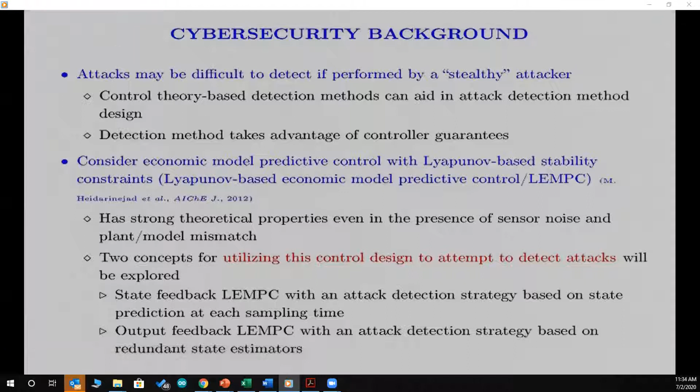This talk focuses on co-design of control and attack detection methods for cyber attacks on nonlinear systems, with a focus on a specific control formulation known as Lyapunov-based Economic Model Predictive Control, or LEMPC. We focus on this control design due to its strong theoretical properties even in the presence of sensor noise and plant model mismatch. We primarily focus in this talk on a state feedback LEMPC with an attack detection strategy based on comparing state predictions and measurements at each sampling time.

We close by mentioning that an LEMPC that receives state estimates instead of state measurements for a process equipped with multiple and redundant state estimators may provide another concept for co-design of control laws and detection algorithms with guarantees.

In general, cyber attacks can be performed to break a typical control loop at some point. In this talk, we focus on cyber attacks that break the control loop between the sensor and the controller and provide false sensor measurements to the controller. This prevents true process knowledge from being obtained by the controller. As we will see later in this talk, this cannot be handled by techniques for handling sensor measurement noise alone.

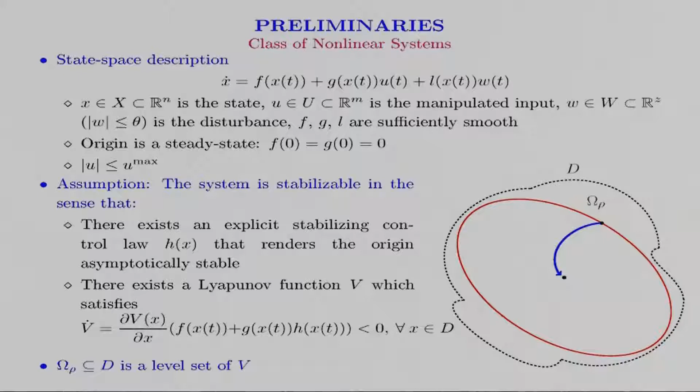We consider that full state measurements are available continuously for this system, but that they are impacted by bounded measurement noise. For this class of systems, we will be exploring the impacts of cyber attacks on sensors for the feedback control law known as economic model predictive control.

With additional constraints to be discussed subsequently, this control formulation has theoretical guarantees regarding feasibility and stability in the presence of sufficiently small bounded measurement noise and disturbances.

False sensor measurements do not ensure boundedness of the error in the state measurements, and therefore do not necessarily allow these guarantees to be maintained.

The additional constraints which allow the closed-loop stability guarantees just described to be obtained are Lyapunov-based stability constraints that, when added to the EMPC formulation on the prior slide, and with a slight change in the way the input rate of change constraints are enforced for feasibility reasons, give a formulation of Lyapunov-based EMPC, or LEMPC.

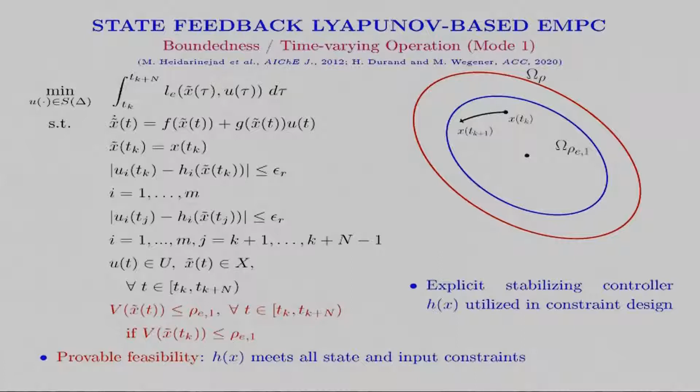This constraint is designed using the explicit stabilizing controller h of x, and that controller is guaranteed to meet all state and input constraints at every sampling time.

This control law also allows us to guarantee that the closed-loop state is always maintained in the stability region omega rho, and also to ensure that the measurement, even though impacted by noise, is also maintained in omega rho.

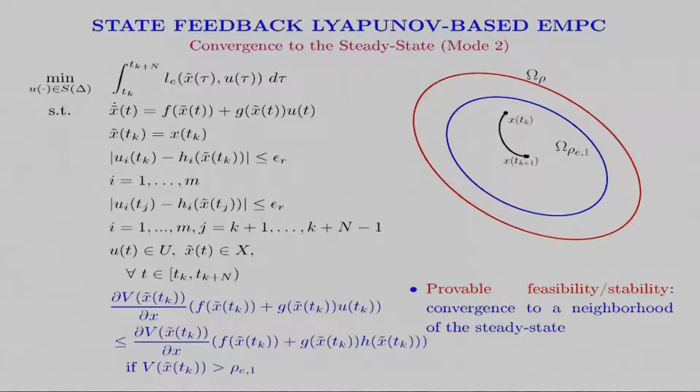The second mode of operation of LEMPC allows both feasibility to be guaranteed as well as stability, in the sense that if the mode 2 constraint, shown here in blue, which enforces a decrease condition on the Lyapunov function, is enforced repeatedly, it can drive the closed-loop state to a neighborhood of the steady state.

Though the control law just described has attractive stability properties, cyber attacks on state measurements provided to that controller could prevent those stability guarantees from being realized.

This is because even though the guarantees just described can hold in the presence of sufficiently small sensor noise, a cyber attack may act like insufficiently small sensor noise.

This indicates that it would be desirable to detect an attack by looking at the deviation of measurements from the actual state. A method of approximating the actual state is through state predictions from the last measurement.

This gives one idea for a cyber attack detection strategy for LEMPC. The difference between the measurement and the prediction of the state could be checked at each sampling time. If the difference is larger than an expected threshold, the state measurement can be flagged as a possible attack.

If it is below a threshold, it should be able to be tolerated by the controller for the subsequent sampling period, in the sense that the closed-loop state should still be within a bounded region of operation at the end of the sampling period. Based on the fact that LEMPC with sufficiently small measurement noise can retain closed-loop stability in this sense,

it should be possible to design an LEMPC that can maintain the closed-loop state in a bounded operating region after what I'll term a sufficiently small cyber attack, meaning one which does not trip the detection mechanism, occurs.

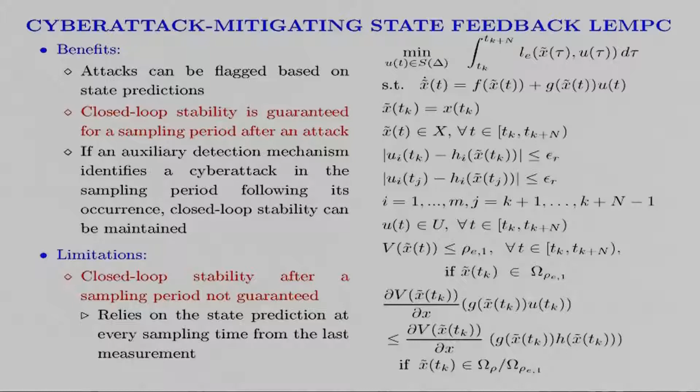This is because it relies on a state prediction from the value provided as the sensor measurement at the last sampling time. Once the last sensor measurement is falsified, the predictions coming from this value are no longer representative of the process state. This can be thought of like the state never receiving true feedback when an attack is occurring, and like sensor noise having a potential ability to grow over time.

We will now provide an illustrative example to clarify the concept that cyber attacks resulting in falsified state measurements, if they are close to the actual values, may not cause an economic model predictive controller to show closed-loop stability issues in a sampling period, even if Lyapunov-based stability constraints are not used. We also demonstrate potential issues with continuously falsified measurements.

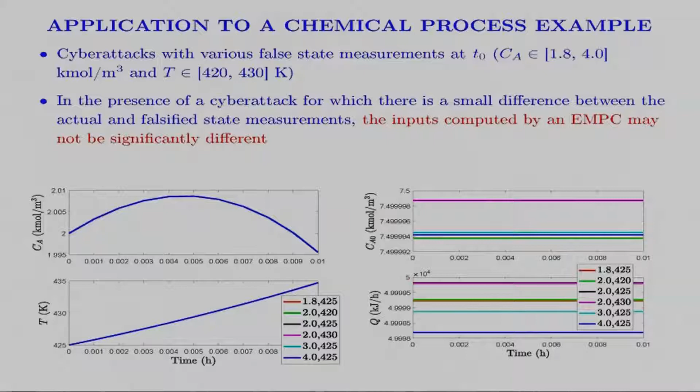Next, we look at how measurement noise and false sensor measurement cyber attacks can differ. Here, we provide a false state measurement to the controller at every sampling time and look at how the actual state evolves compared to the false state trajectory. The false state trajectory is obtained by simulating the process dynamic model, where at every sampling time, the initial value of the false state measurement is set to be 0.2 kmol/m^3 and 5 K above the predicted values. These are being predicted from the last value provided as the measurement to the EMPC, which was false.

The simulations indicate that despite that at every sampling time, the falsified state measurement is within a bounded amount of the values predicted from the prior value provided to the LEMPC, there is a potential for error between the predicted and actual state to grow over time. This demonstrates the concept that measurement noise and false sensor measurement cyber attacks are not equivalent, because while with measurement noise there is some error at every sampling time, that error is within a range of the actual measurement. In contrast, in false sensor measurement cyber attacks, effectively, feedback of the process state is not obtained, perhaps not even approximately.

These simulations highlight that a key limitation of the proposed method for attack detection and resilient control is that the detection technique relies on state predictions. Once one measurement is falsified, the predictions are no longer reliable. A concept for overcoming this is to replace the state feedback LEMPC with an output feedback LEMPC, meaning an LEMPC that utilizes an estimate from a state estimator in its design. If redundant state estimators are available and only the one used to provide estimates to the LEMPC is impacted by a sensor measurement attack, the others can be utilized to flag this because, in effect, they provide a check on whether the state estimate being received by the LEMPC is sufficiently accurate.

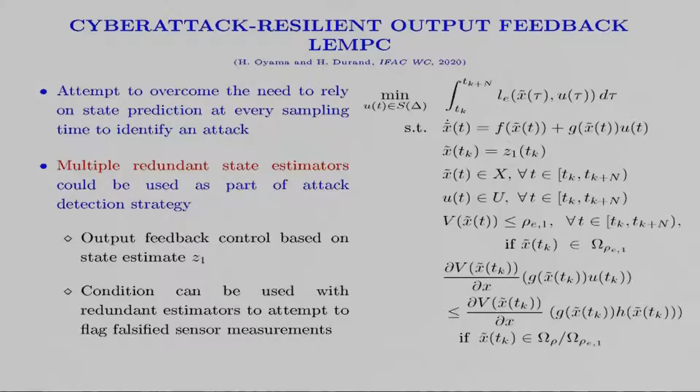In conclusion, detection mechanisms using LEMPC may take advantage of control theoretic guarantees in detecting attacks. In this work, we focused on a state feedback LEMPC formulation that was considered to mitigate cyber attacks in the sense that it guarantees closed-loop stability over a sampling period in the presence of disturbances, measurement noise, and false sensor measurements within a bound on the error between the prediction of the state from the last measurement provided to the LEMPC and the state measurement at a given time.

When the attack is not sufficiently large to be detected at a sampling time, then if an auxiliary detection mechanism does not detect it during the subsequent sampling period, closed-loop stability could be compromised after that time. To overcome this, other techniques could be tried, such as using an output feedback LEMPC with multiple redundant state estimators, where only the estimator providing estimates to the LEMPC is assumed to be able to be impacted by false sensor

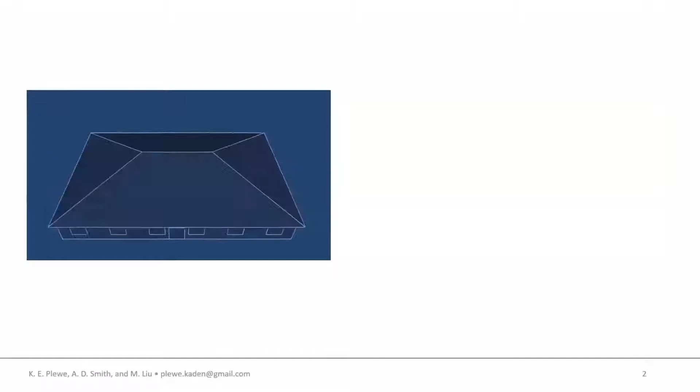I'll start by going over the objectives that we prioritize in the design of this predictive control framework that's being used to optimize the dual temperature set point schedule in a small office building, which is selected here as the test case. Priority number 1 is occupant thermal comfort, which requires being cognizant of the occupancy schedule in order to ensure that whenever there's somebody in the building trying to perform a task, that they are comfortable enough to do so. Now, priority number 2, which is coupled to the first and typically inversely proportional to it, is the cost of HVAC operation, which in our case translates to HVAC power demand and also HVAC energy usage.

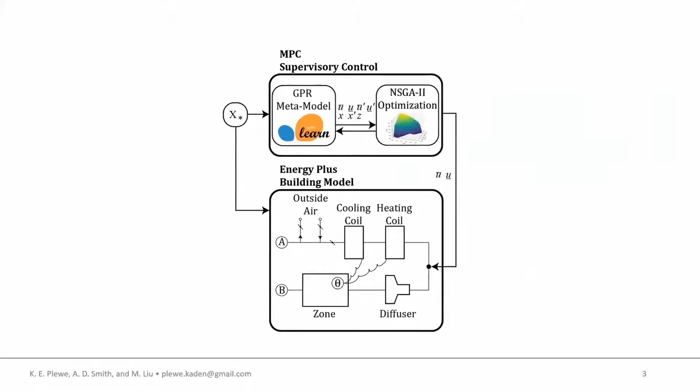Now, the main contribution of this work is the fusion of emerging technologies in both building modeling and building optimization, with the purpose of developing a supervisory predictive control framework that can be extrapolated into the real-world complex building domain. Here we start by deriving a data-driven building model with the intention of limiting the number of inputs to be as small as possible. And here we were able to get that down to just 7 inputs. And each of these 7 inputs are typically readily accessible to the building manager.

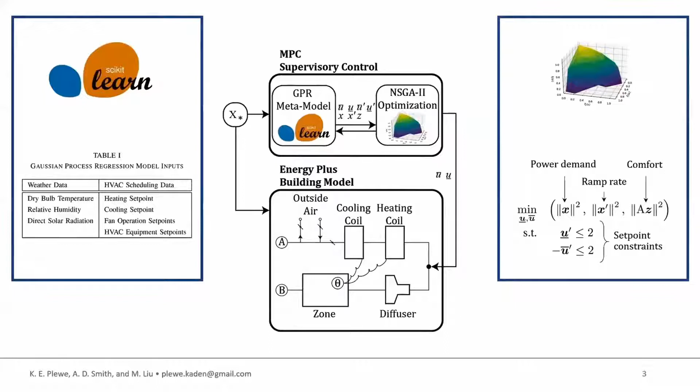Now, this building model can be used in a multi-objective optimization problem over the prediction horizon in order to, again, focus on minimizing the power demand and energy usage while maintaining thermal comfort and operating within our given constraints. From this, we get the optimal temperature set point schedules that we can then apply to the real building, or in this case, a detailed building model that we're using for testing. These are the main results that are presented in the paper, where we show an average 35% energy reduction across 3 different simulations with minor gains and reductions in thermal comfort.

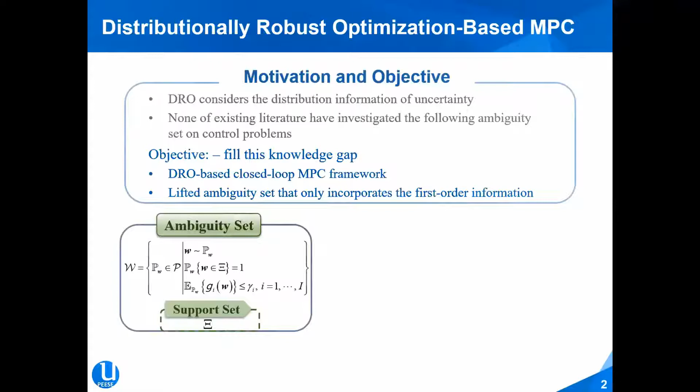To fill this knowledge gap, we developed the DRO-based closed-loop MPC framework associated with the lifted ambiguity set, which is equivalently transformed from the original ambiguity set by a lifting operator. The reason why we are interested in this type of set is that, if associated with this set, the DRO problems can be reformulated into a traditional robust optimization problem with respect to the lifted support set. Existing literature has shown that the ambiguity sets are equivalent in describing the distribution information after lifting.

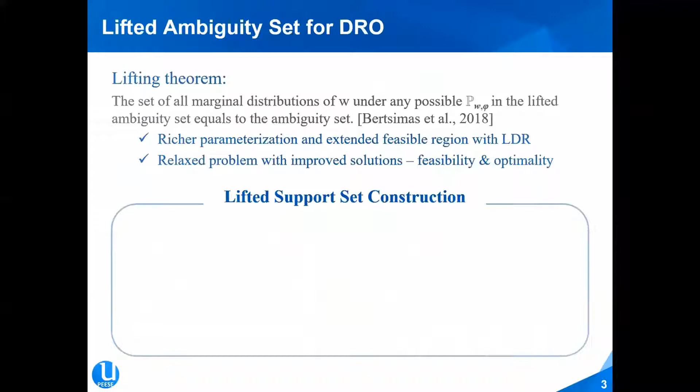Besides, when using the linear decision rule to parameterize the decision variables, the problem is eventually relaxed with improved solution qualities in terms of feasibility and optimality. We want the lifted support set to be a polyhedron such that the reformulated RO problem can be recast into an efficient linear program. In order to do that, the support set is chosen as a simple box set, and the affine function G is constructed based on principal component analysis. In this way, the lifted support set is polyhedral, and only the first-order distribution information is needed.

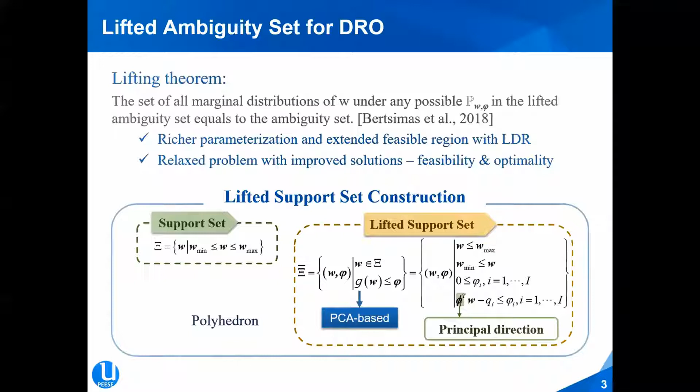Welcome to this talk, which is on scheduling and control over networks using MPC with time-varying terminal ingredients. I am Stefan Wildhagen, and this is joint work with my PhD advisor Frank Allgöwer. We are both from the University of Stuttgart.

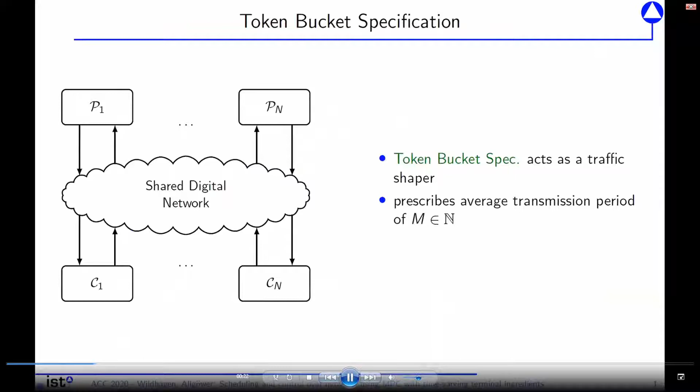In networked control systems, a number of control loops are closed over the same shared network. A known method from the literature on shared communication systems to shape the traffic of transmitting agents and thereby prevent congestion of the network is the token bucket specification. It prescribes an average transmission period of m, but nonetheless allows for scheduling of transmissions. However, it was rarely used in the context of networked control systems so far.

In this work, we combine networked control systems with the token bucket by considering a controller that guarantees stability of the control system and at the same time fulfillment of the token bucket specification. In particular, we consider an MPC for a joint control and scheduling of transmissions. An existing control scheme for this task is a multi-step MPC, which optimizes the transmission schedule and corresponding control inputs over a prediction horizon of P. Then it applies the first m steps in closed loop during the sampling period, which is exactly the same as the token bucket period. And then the process is repeated.

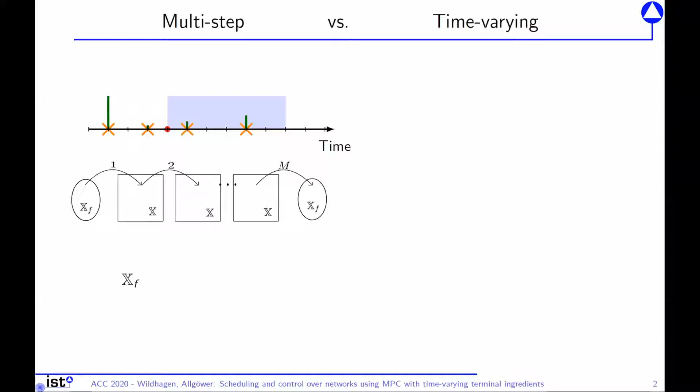The multi-step formulation is required since in general, one can only find an m-step control invariant terminal set, as the token bucket allows the transmission of an updated input only every m steps on average. However, a problem is that the complexity of the optimization problem grows exponentially with the prediction horizon, since the transmission decision at each time step can either be yes or no. Naturally, the prediction horizon must be at least m steps long, and as a result, if the token bucket period m is large, real-time capability of the control scheme is quickly jeopardized.

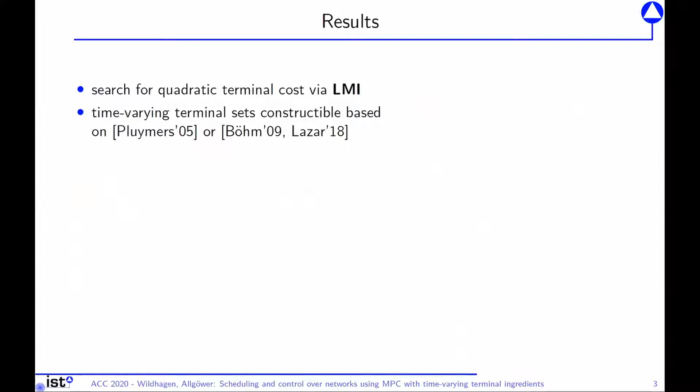What we would desire instead is an MPC with a sampling period of 1 as usual, since then the prediction horizon and hence the complexity could be chosen independently of the token bucket period. To this end, we consider instead m different periodically invariant sets, which are then used in this approach as periodically time-varying terminal sets. In our paper, we show that for linear systems, the search for suitable time-varying terminal costs is possible via an LMI, but the time-varying terminal sets can be constructed by adapting existing methods. Then the periodically time-varying MPC is recursively feasible and achieves convergence.

In a numerical example, we consider a token bucket period of 8 and compare the times to solve the optimization problem with different prediction horizons.

While for time-varying MPC, we were able to achieve quite low computation times, the computation time of the multi-step MPC is at least 0.5 seconds. For many real-time tasks, this is already too long. We conclude that a periodically time-varying MPC now allows to adjust the complexity independently of the token bucket period, which enables a trade-off between a reasonably long prediction horizon and real-time requirements, which was not possible before.

The world is becoming more digital. Everything is getting a computer processor in it from cars to benches. So it is imperative that we continue to create control systems that are more conducive to digital implementation. An interesting example of this is nonlinear model predictive control, also known as NMPC.

This controller has the advantages of 1, selecting the optimal control input based off the model of the system, a cost function, and some constraints. And 2, having the ability to be designed in discrete time. For output feedback, a fast discrete time observer is used because of how quickly and accurately it can estimate the states. However, an issue arises between these two.

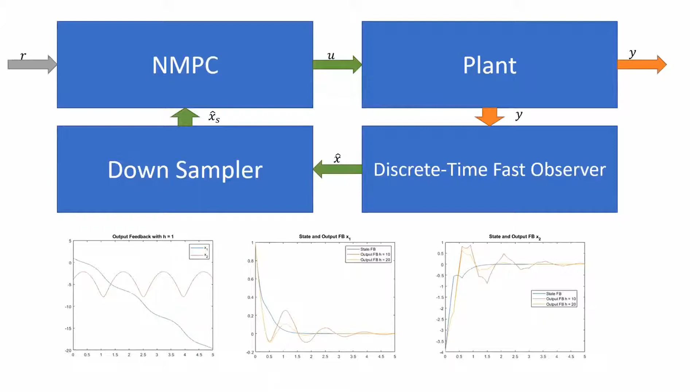Again, the whole idea is to use a controller and an observer that can be designed in discrete time and run at different sampling rates to ease implementation. Thank you for your time.

Good morning, everyone. First, let me introduce myself. I am Valentino Orsini, and I'm going to present the paper "Two degrees of freedom of control and B-spline functions as tools for a reduced complexity approach to MPC." The aim of this paper is to simplify the treatment of the major issues of MPC. These issues are the stability and feasibility problems, and the complexity of the online optimization procedure.

The basic point of the alternative approach proposed here is the adoption of an MPC strategy in a 2 degree of freedom of control scheme like that shown in the figure. In this scheme, the output r(k) of the feed-forward input estimator is used as input forcing the closed-loop system Sigma F. Sigma F is given by the feedback connection of a linear time-invariant plant with a linear time-invariant feedback controller.

Using a 2 degree of freedom of control scheme allows us to decompose the MPC problem in 2 distinct steps. The first step is the offline design of the feedback controller. The task of the controller is to guarantee the stability of Sigma F as well as the fulfillment of hard constraints on some physical variables in correspondence of any admissible input r(k).

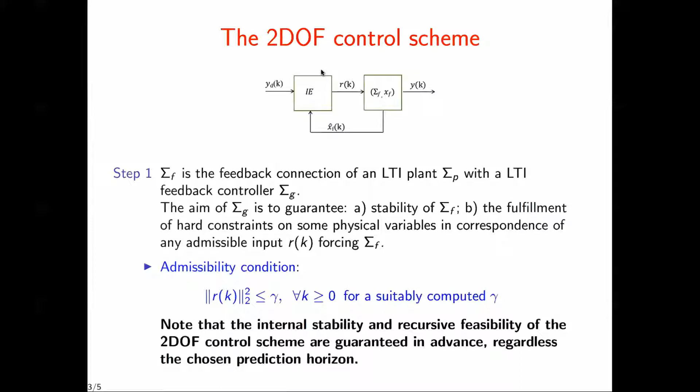With the term admissible input, we mean an input whose Euclidean norm is upper bounded by a suitably computed scalar gamma. It is important to stress that step 1 guarantees in advance internal stability and recursive feasibility regardless of the chosen prediction horizon. The second step is the design of the feed-forward input estimator.

It is advantageous to use B-splines because they admit a parsimonious parametric representation. This allows us to drastically reduce the number of decision variables involved in the optimization problem. Moreover, B-splines are contained in the convex hull of the control points. This property allows us to transfer the norm bound on r(k) to constraints on the relative control points. In conclusion, modeling r(k) as a B-spline reduces the constrained optimization problem to a much simpler least square estimation problem.

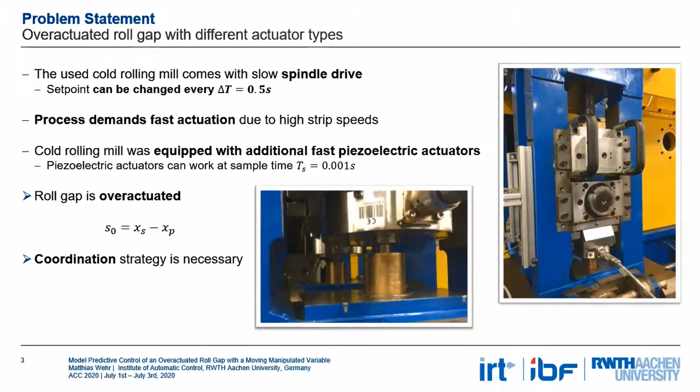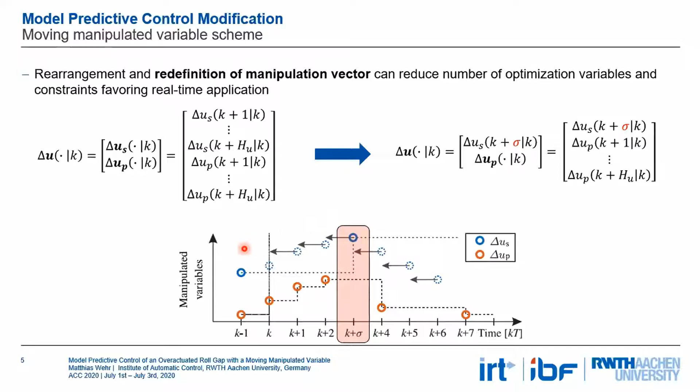Therefore, we have rearranged the manipulation vector, having the entries for the spindle drive and the piezoelectric actuator one below the other. Since the spindle can only be actuated at certain times, it only needs one optimization variable for manipulation. Constraints are not necessary anymore due to reduced degrees of freedom. The control horizon of the piezoelectric actuator remains unchanged. Since the time of the spindle set point changes every iteration, the manipulated variable of the spindle moves through the control horizon of the piezoelectric actuator.

Simulation results show that a full-scale MPC with constraints and the proposed MPC show nearly the same tracking performance. However, the proposed MPC needs fewer optimization variables and constraints, which is advantageous for real-time applications. Further experimental results are available in the paper proving real-time capability.

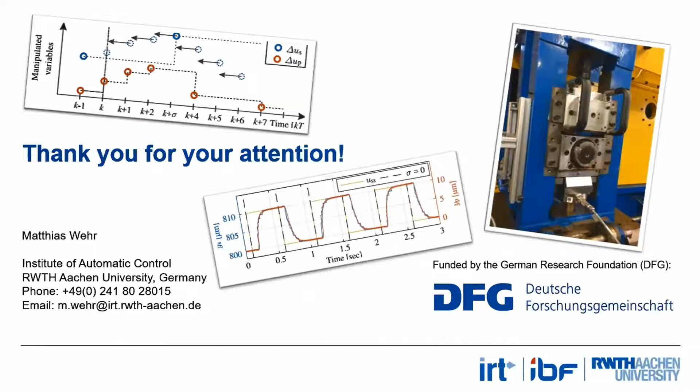Hi, my name is Christoph Mark. I'm a PhD student at the University of Kaiserslautern in Germany, and today I'm going to present our paper about stochastic output feedback MPC for distributed systems. In this work, we extend one of our recent papers about distributed state feedback SMPC to the output feedback case.

We consider M linear time-invariant systems of the form given by equation 1. We have zero mean, independent and identically distributed process and measurement noises Wi and Di. And furthermore, the dynamics are subject to local chance constraints on the states and controls, where Xi and Ui are convex polytopes. Px and Pu are the corresponding levels of chance constraint satisfaction for the states and controls.

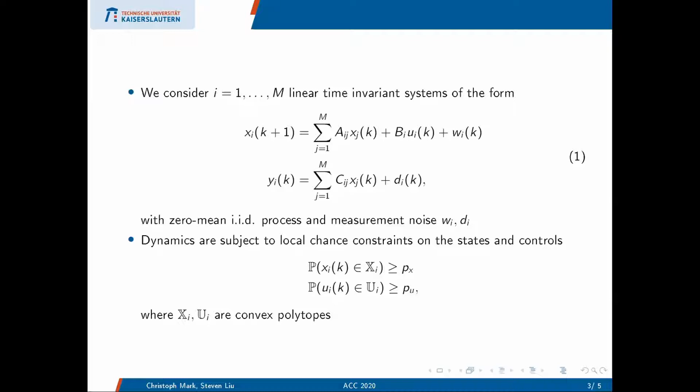In this work, we use the concept of probabilistic reachable sets to handle the chance constraints. The PRS are characterized through the first two moments of the error states E, where Z is the state of the nominal or disturbance-free system. The nominal dynamics are used to make the prediction within our optimization problem.

The resulting tightened DMPC problem has now the same online complexity as a nominal DMPC. The main contribution of the paper is the following. First, we present a synthesis method for distributed covariance matrices based on distributed optimization.

Secondly, we prove recursive feasibility, convergence to an asymptotic cost bound, and closed-loop chance constraint satisfaction under a central convex unimodality assumption on the disturbance distributions. And thirdly, a numerical example is carried out to highlight the chance constraint satisfaction and performance compared to a central MPC. Thanks for your attention.

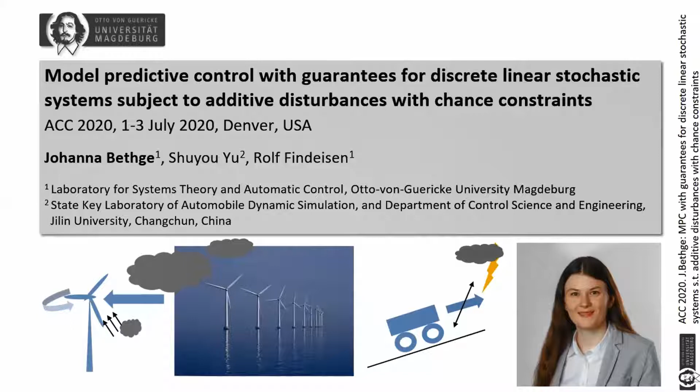In this paper, we proposed a self-containing predictive control scheme for linear systems subject to additive disturbances while guarantees are given. The proposed approach is able to control real systems under disturbances, for example, to adjust wind turbines to the main wind direction or to design cruise and steering control for driving assistance systems and autonomous vehicles. Our stochastic model predictive control approach enables optimal and foresight control and is self-containing in the design, while guarantees are ensured.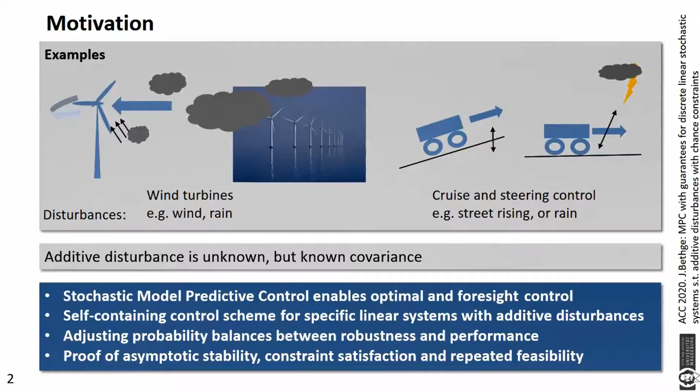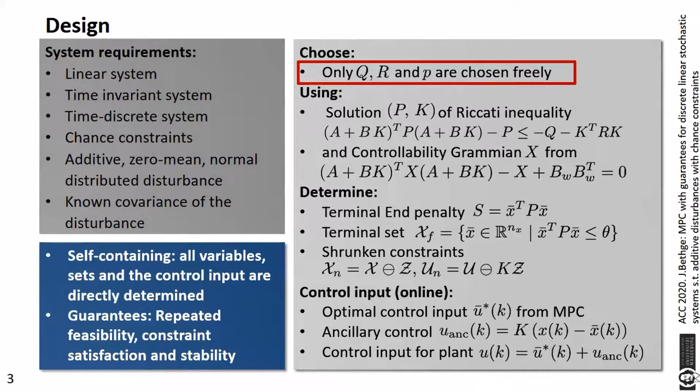The control input U is composed of the nominal optimal control input, which is the solution of the optimal control problem from the model predictive controller, and an ancillary control input which ensures that the closed-loop real system stays close to the nominal system. The constraints of the predictive controller are shrunken due to the chance constraints in the self-containing controller design. Furthermore, our proposed approach guarantees safe operation.

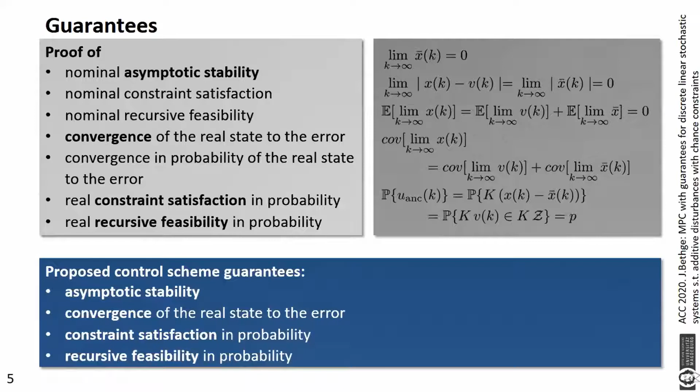In particular, we have proven asymptotic stability of the nominal system, convergency of the real system to the error system, and constraint satisfaction and repeated feasibility for the given probability of the chance constraints. In addition, we have shown proof of concept simulation. In the example, a wind turbine is adjusted to the main wind direction. All guarantees are ensured while the computational burden is only as high as for conventional MPC.

So let's summarize. We proposed a stochastic and self-containing predictive control scheme for linear systems under disturbances, where only the covariance of the disturbances must be known. The control scheme enables the balance between robustness and performance, while asymptotic stability, constraint satisfaction, and repeated feasibility are ensured in probability. Thank you very much for your attention.

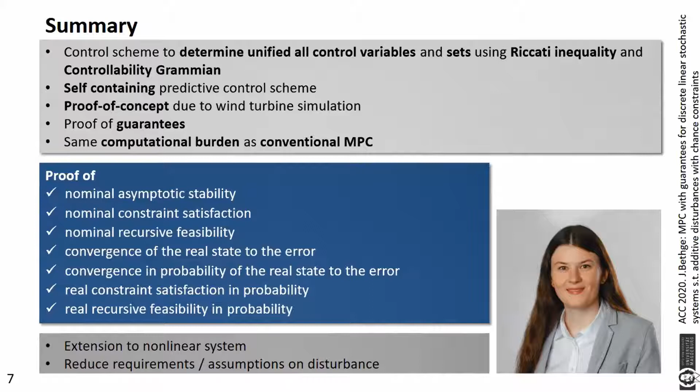So this here is basically the setup we consider in this work. We have a plant which is affected by some additive disturbance, which is unknown but bounded, with constraints on the input as well as on the state. And we want to design the controller such that it satisfies the constraints, it robustly stabilizes the closed loop system, it achieves high control performance, and it can also be implemented efficiently.

And one specific candidate for such a controller is tube-based MPC, but we know that it might be conservative, and therefore we propose in this work to blend different tubes. So this is basically the setup we consider. We have here the dynamics with the additive disturbance, and the tube-based MPC, which basically solves more or less a nominal MPC problem with some additional degree of freedom.

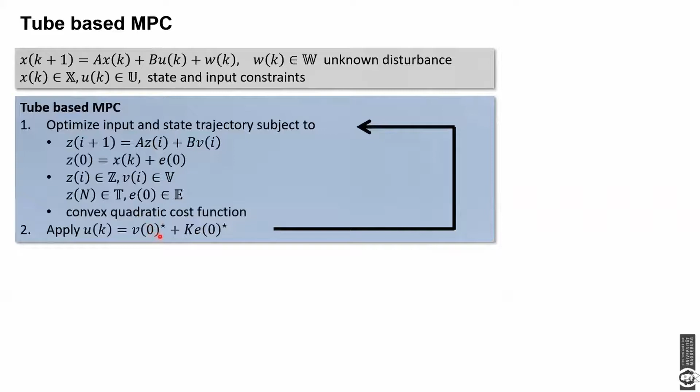And then we have the controller, which is basically the first part of the optimal nominal input and some additional correction. And I won't go into detail, but what we see is that there are some sets as well as the gain K, which basically influence the MPC. And this gain K also basically plays a major role in determining these four sets. And then the question arises, how should we basically choose this gain K to design the MPC controller?

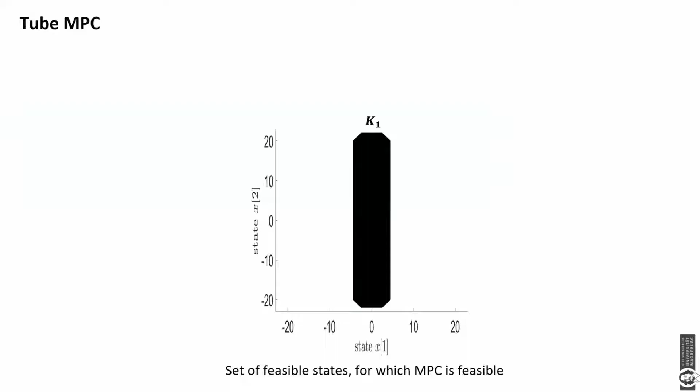And then this brings us to the question, can we use both gains or both tubes? And this is then what did this work. And basically the key idea is that yes, we can do this. And we can do this by blending the tubes. And this gives then the set shown here in green, which includes both sets, the red one and the black one. And this brings us to the conclusion of this work.

So we have now this MPC scheme with multiple tubes and the desired closed loop properties like constraint satisfaction and robust stability. And moreover, it's less conservative than standard tube-based MPC. It has a better performance and it's still efficient to implement.

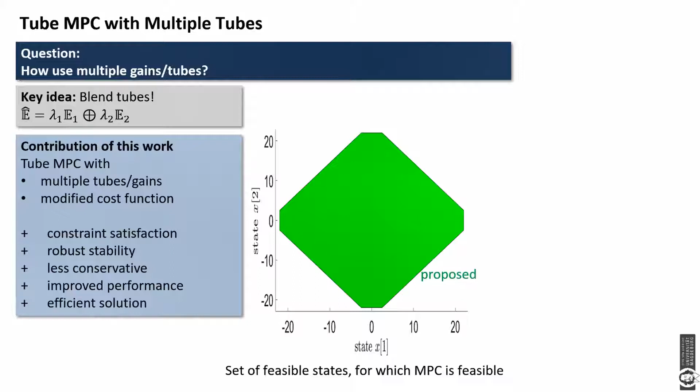Hi everyone, I am Nikos Planakis and I am a PhD student at the National Technical University of Athens. Our work is entitled Nonlinear Model Predictive Control for the Transient Load Share Management of a Hybrid Diesel-Electric Marine Propulsion Plant. Authors are with the Laboratory of Marine Engineering at the National Technical University of Athens.

The problem that is addressed in this work is the performance of the hybrid power plant in extreme transient loading conditions in terms of fueling and emission production. As such, the object of this work is the modeling, the design and the experimental implementation of the power smoothing power split strategy for a hybrid marine powertrain. The system that is studied is a parallel hybrid marine power plant. It is a multivariable system with nonlinear behavior.

Rotational speed and battery state of charge dynamics are controlled by commands that are provided to the power sources. External mechanical load acts as disturbance. The system is also constrained either by its physical limits or by desired operating limits that have to be taken into account. The modeling was performed based on first principles and measured data.

The control system architecture utilizes the measurements and the system model to calculate the optimal ΔU commands that minimize the objective function. The objective function is selected such that a smooth engine transient operation with minimum electric energy consumption is achieved. Input constraints of the system are considered explicitly while output limits are treated as soft constraints.

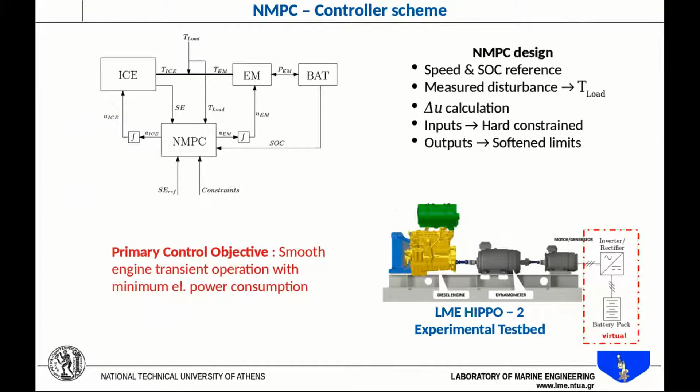The control system was implemented and experimentally tested at the laboratory's experimental facility. The operating profile during experiments included disturbance step loading. Nonlinear model predictive control operation is compared to the operation of the conventional propulsion plant without hybrid configuration. Controller sampling frequency was selected 10 Hz.

From the experimental results, it is seen how the electric motor deals with the fast system dynamics while the engine is controlled to restore the consumed battery energy. Engine performance proves that overshoots are suppressed and the engine derives a quasi-steady-like operation with the proposed control strategy, leading to a better overall fuel economy and mean NOx emission reduction.

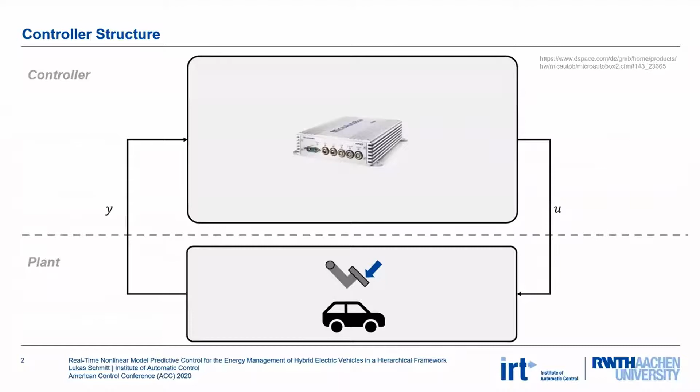The control task is to optimally operate a hybrid electric vehicle, meaning that we want to minimize energy consumption while at the same time deliver the requested torque as fast as possible to achieve a good drivability. Because these tasks take place on different timescales, we present a hierarchical framework. The high-level controller, which I will focus on in this talk, addresses the energy efficiency using NMPC for long-term planning and calculating the optimal torque split.

The low-level controller employs linear MPC to deliver the driver's requested torque at a fast sampling rate, while at the same time considering constraints and actuator dynamics. For the controller internal model, we first identify in a static modeling approach the actuator efficiencies from steady-state test bench measurements depicted as gray dots. We model a mathematical relation between mechanical power and resulting consumption with second-order polynomials which are twice continuously differentiable and therefore suited for our gradient-based optimization algorithm.

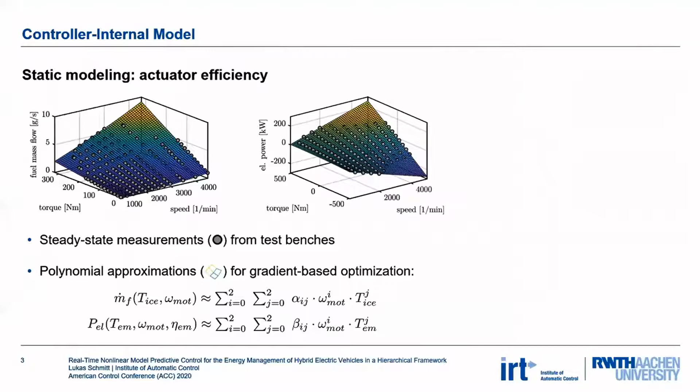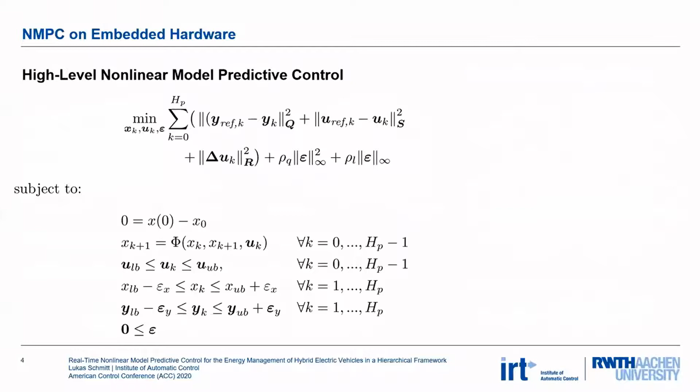Secondly, we model the battery dynamics using an equivalent circuit model. The necessary parameter identification is carried out with simulation experiments with a high-fidelity model of our project partner and least squares methods. Putting it all together, we arrive at a nonlinear program to be solved at every time step. We employ a multiple shooting algorithm for discretization, resulting in both states and inputs being optimization variables.

Additionally, we employ soft constraints for state and output constraints to guarantee feasibility of the NLP at all times, which is especially important for real-world applications. Lastly, our chosen integration scheme is a simple Euler backward scheme. We generate code from our NMPC scheme and in addition for our plant model at the low-level controller and run our algorithm on rapid control prototyping hardware.

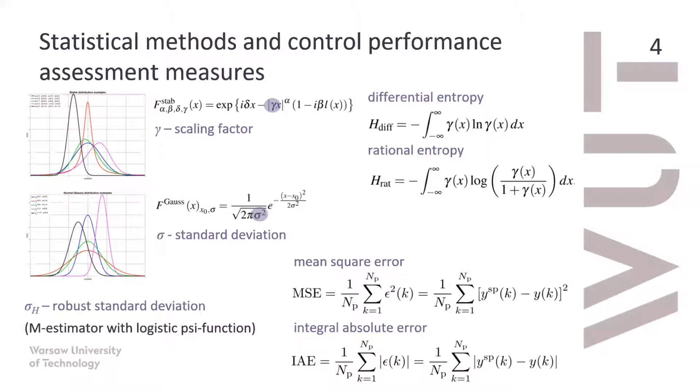To measure the poor quality of control, we can use different indexes. Apart from standard mean square error or integral absolute error, together with the standard deviation, we suggest to use robust indicators like, for instance, gamma scaling factor from the alpha stable distribution, robust standard deviation using M estimator with logistic psi function, and different kinds of these.

Concluding, first of all, in real processes, we need non-Gaussian approaches. We have tested different CPA measures applied to the MPC tuning. First of all, we have shown that standard measures of mean square error and standard deviation together with rational entropy fail to detect wrong tuning, in contrary to the integral absolute error, robust standard deviation, scaling factor of the alpha stable distribution, and differential entropy.

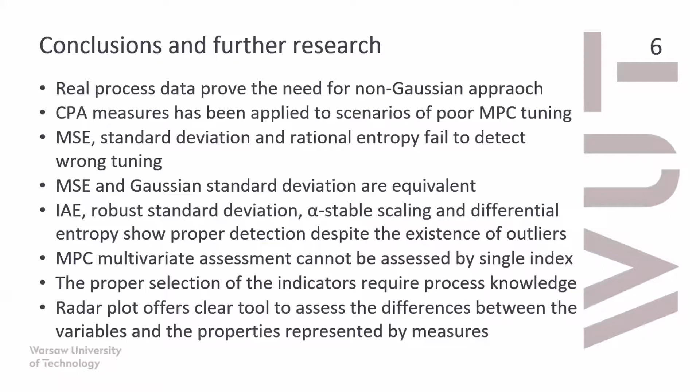Finally, the task of the assessment for the MPC multivariate control cannot be solved by a single index, and thereby we need multi-criteria approaches, and we suggest to use the radar plot as the simple representation of the complicated multi-criteria results.

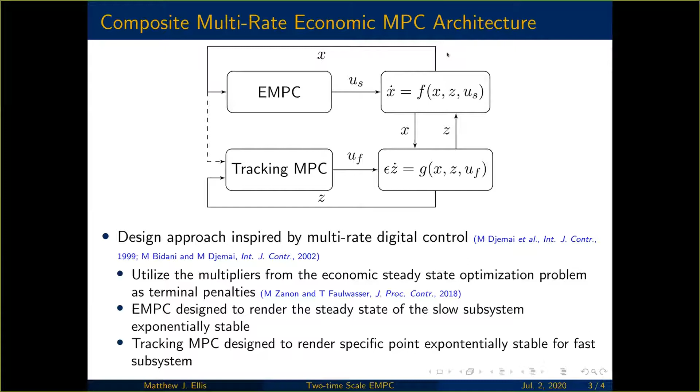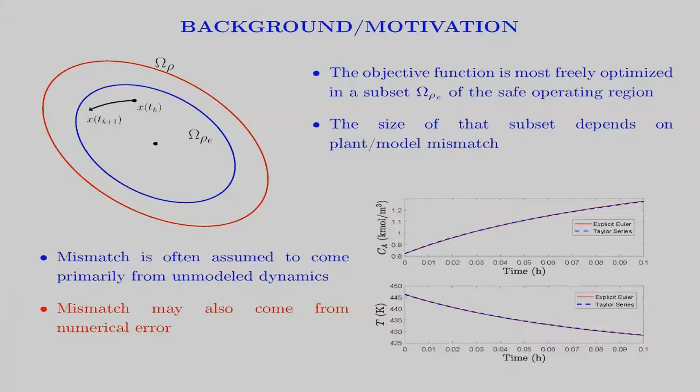Higher accuracy approximations of the solution of a dynamic model can increase computation time for an EMPC. This work therefore seeks to make precise connections between closed-loop stability considerations and model solution approximation in LEMPC. This essentially allows the implications of numerical error to be characterized for the LEMPC design, including how they impact the stability region subset size, and can facilitate understanding of the trade-off between computation time of the controller and potentially economics via the size of the stability region subset.

The specific methodology employed in this work is to focus on a class of nonlinear systems with an analytic right-hand side and analytic solutions. Then, a truncated Taylor series approximation of the solution of the dynamic model is used in the controller. The control formulation is analyzed for closed-loop stability considerations, with the truncation error for Taylor series allowing derivation of a relationship between the approximation of the process dynamics and closed-loop stability considerations. For example, the size of a subset of the safe region of operation is explicitly related to the number of terms in the Taylor series approximation.

Smaller error resulting from the model solution approximation allows a less conservative subset of the safe operating region to be used in the control law design. Larger error may lead to greater conservatism, but also may decrease computation time.

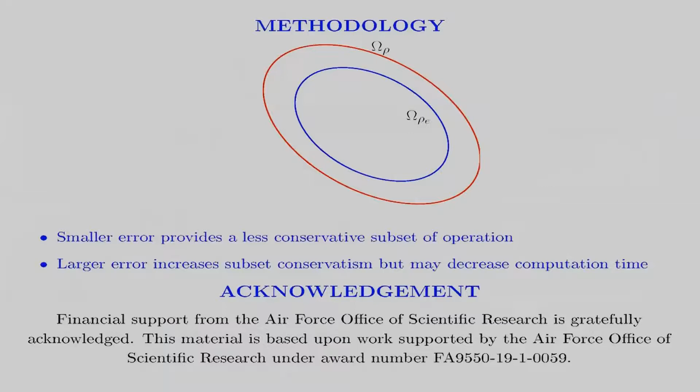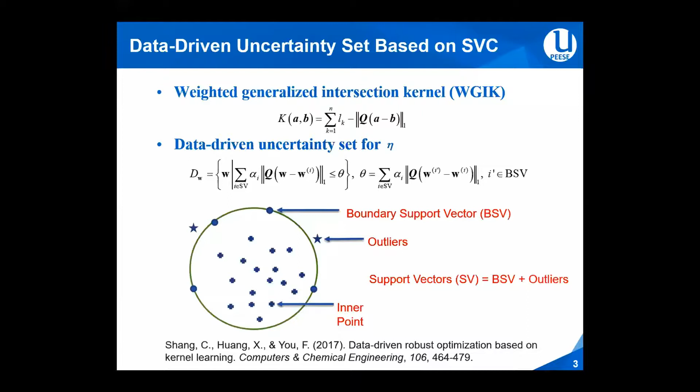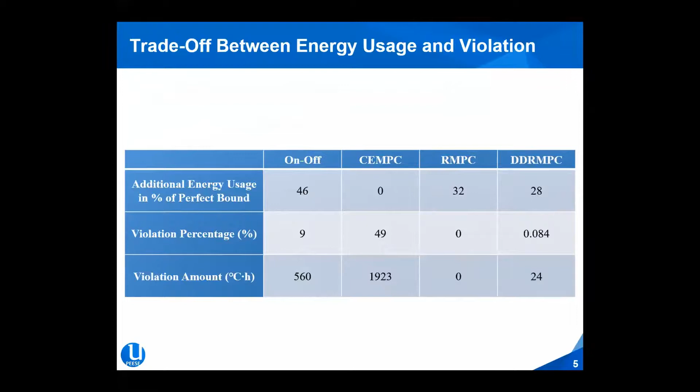Hi, my name is Wei-Han Chen, a graduate student at Cornell University. In this work, we developed a novel data-driven robust MPC framework to achieve efficient irrigation control for stem water potential. Traditional irrigation systems aim to preserve the soil moisture level by efficient configuration of water resource. However, the factor that really affects plant performance is stem water potential rather than soil moisture level. Therefore, the more direct approach would be sensing the water potential inside the tree trunk or stem.

Such measurements are made possible with emerging tools such as a microtensiometer. The dynamics of water flow through soil, roots, and the tree trunk could be modeled by a circuit analog. Soil, roots, and the tree trunk serve as both capacitors and resistors in the system. Evapotranspiration is the driving force of the RC circuit model. Another input is the water inflow, which is contributed by the precipitation and irrigation amount.

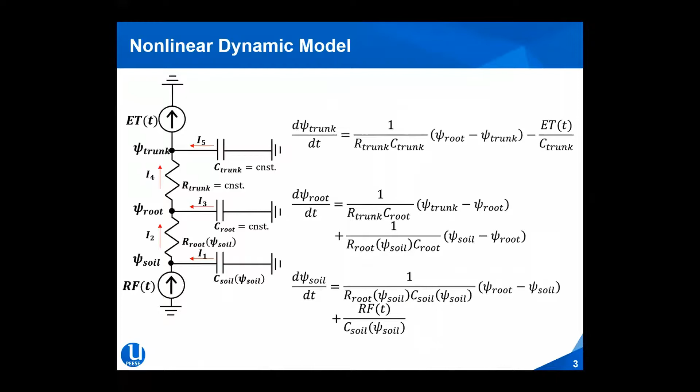The dynamics of water potential in the soil, root, and trunk can be represented approximately by the system of nonlinear ODEs. In the water dynamic system, disturbances are evapotranspiration and precipitation. MPC could utilize weather forecasts to help irrigation control. However, the underlying weather forecast errors could cause stem water potential to go below the minimum acceptable value, and plants would suffer from water stress.

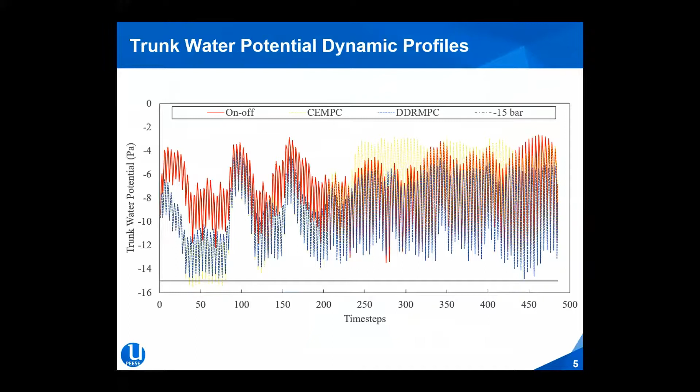Hello everyone, welcome to our remote rapid interactive of our paper, which carries the following title: Tube-Based Robust MPC for Distributed Parameter System Modeled as Polytopic LPV. Firstly, my name is Jawad Ismail, and I am a scientific assistant of Professor Liu at the University of Kaiserslautern.

This paper introduces a simple online feed-forward and feedback approach for active vibration damping control using a robust tube MPC, which is applied on a nonlinear flexible system for vibrational damping control.

This paper also discusses a possibility of embedding nonlinearities inside the linear parameter varying system and thus making use of a numerically low-demanding linear MPC. The resulting mismatches are treated as parametric and additive uncertainties in the context of robust tube MPC. Exact embedding is also possible with existing literature.

For the proposed approach, most of the computations are carried out offline. Only a simple convex quadratic program is conducted online. Additionally, a soft constraint extension is proposed. The uncertain system is firstly decomposed into a nominal and error states of the uncertain system, denoted as Z and E respectively. Given the corresponding initial states and constraints from the nominal dynamical system, the robust tube MPC can be proposed.

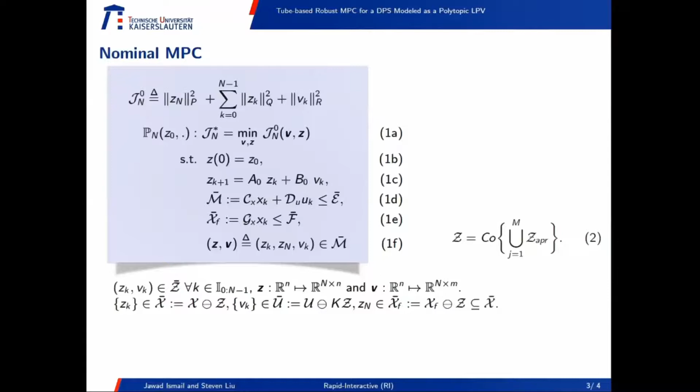We also impose general hard constraints on the state input space given in polytopic representation. A maximum positive invariant set is computed as a terminal set, and sets are tightened by means of the disturbance invariant tube, known to be the minimal robust positive invariant set. For simplicity, a convex hull of the union of each approximation of the minimal robust positive invariant set, given for vertices of the LPV system, is considered here. Additionally, soft inequality constraints are added, whose idea is shown in this picture.

Together with the help of the nominal state and the control sequence, a feedback policy is obtained, known as the dual mode paradigm.

In this example, both open-loop and closed-loop simulations with the objective of active vibrational damping control are carried out on the example of a flexible stacker crane. Stacker cranes contain two moving masses and a flexible link, whose vibrational behavior must be controlled. This problem is solved in terms of tube-based MPC as online closed-loop control.

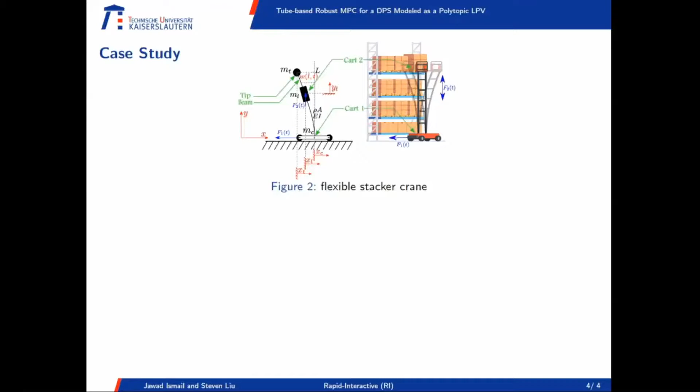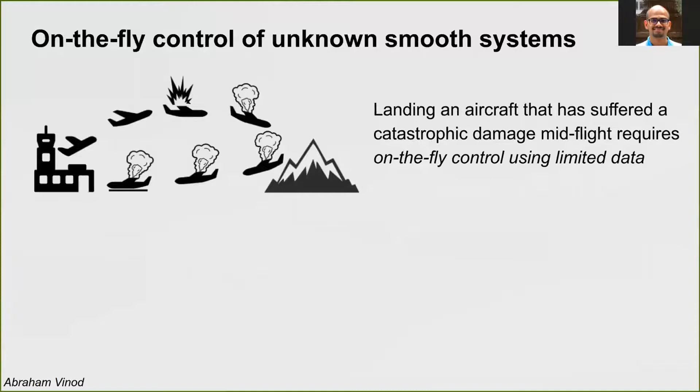In this work, we designed a state feedback data-driven controller using optimization. Our method combines smoothness of the unknown system with the data available from a single finite horizon trajectory and can also accommodate side information if it is available. Our approach is computationally efficient since it solves a linear program at each time step.

The problem setup goes as follows. We are given data from a single trajectory. We are told what the control constraints are, and the desirable behavior is encoded in a known one-step cost function, small c. The dynamics, which is nonlinear, is known to be smooth, but the dynamics as such is not known.

At each time step, given the current state xt, we minimize an unknown cost function, capital C, subject to the control constraints. As you can see here, we focused on a one-step controller because we cannot plan for the future. We do not know what the dynamics are. By on-the-fly control, what we mean is that we can evaluate the unknown cost function and its gradient only for the controller that was selected at that time instant.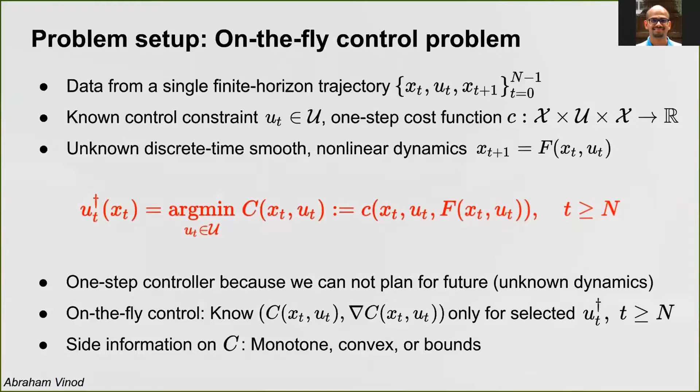Our method can accommodate side information on C, including that C is monotone, convex, or has known bounds. However, this information is not necessary for the algorithm to work.

Our approach, which we call C2opt, utilizes the fact that since C is smooth, it admits data-driven over and under approximations. Therefore, at each time instant, it minimizes a linear combination of these approximations. We were able to show that for alpha equal to half, this optimization problem actually is linear, resulting in a computationally efficient solution.

We applied C2opt on landing a damaged aircraft, where the damage resulted in unknown nonlinear perturbations to the longitudinal dynamics. We found that C2opt took less than 0.2 seconds at each time step when starting from an initial trajectory that was randomly drawn for 10 time steps.

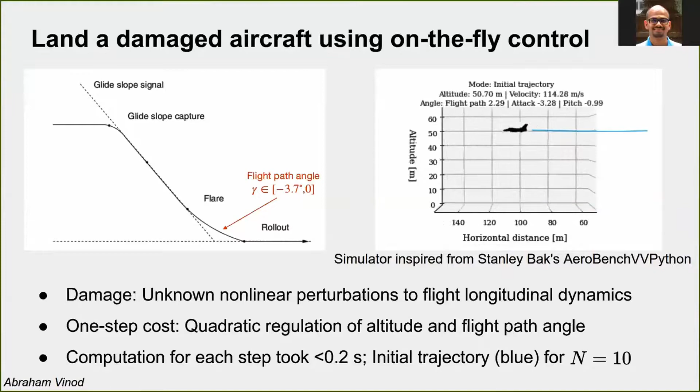Come see us in our digital poster session, where we can discuss this example in more detail and also discuss how C2opt beats existing methods. A version of C2opt also enjoys sublinear regret as well. Thank you for listening.

Hi there, my name's Huck, and my co-author's name's David. We work at Honda Research Institute, and today I'm going to be talking to you about some work we did last summer to develop an accurate trajectory following algorithm.

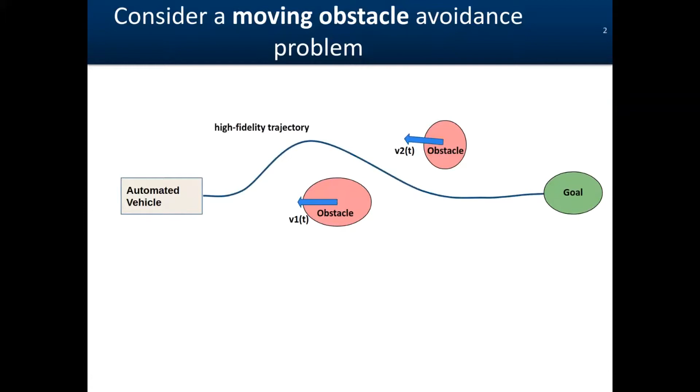So, motivating accurate trajectory following, consider you have an automated vehicle. It needs to avoid collisions with moving obstacles and get to a goal. You generate some trajectory, and if you don't follow carefully enough, you might crash.

So, now diving into various trajectory following architectures, consider this case. You have a trajectory planner and you just want an open loop controller. So you have steering angle and speed signals sent to this controller, and depending on the current time, the steering angle and speed is interpolated, and you send those signals to the plant. So this can happen very quickly while your planner is updating, but you're not taking into account the current state. So this is a naive approach, but in this work it's incorporated for comparison.

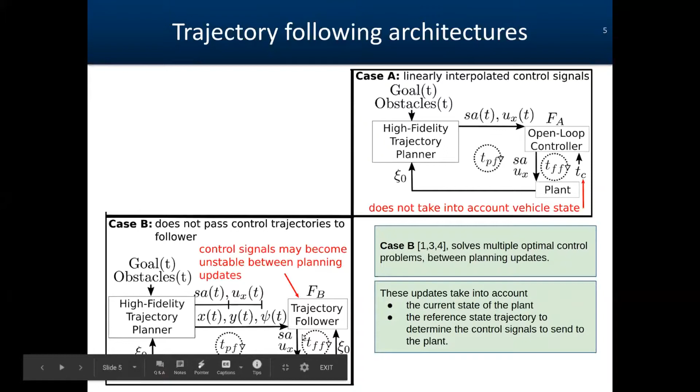And case B is what is actually the state of the art. So you're solving an optimal control problem for your trajectory follower. And this is taking into account the state of the vehicle, and the one thing that it's not doing is it's not passing, if you can see here, the trajectories for steering angle and speed to the trajectory follower. So the control signals are not incorporated into the problem at all. So if the planner is taking a long time to update, then the control signals that are sent to the plant might become very jittery. There's no reason that they have to be any particular values. They could jump all over the place.

So the idea in this work is to pass those control signals to the trajectory follower. And in this paper, we include those trajectories in the cost functional of this optimal control problem. And we compare the three cases that I just discussed in a whole bunch of trials where we vary the obstacle speed and size of an obstacle that's traveling directly towards the vehicle. And you can see that, of course, a collision is a red dot. So you can see as the obstacle gets bigger and faster, it becomes harder to avoid.

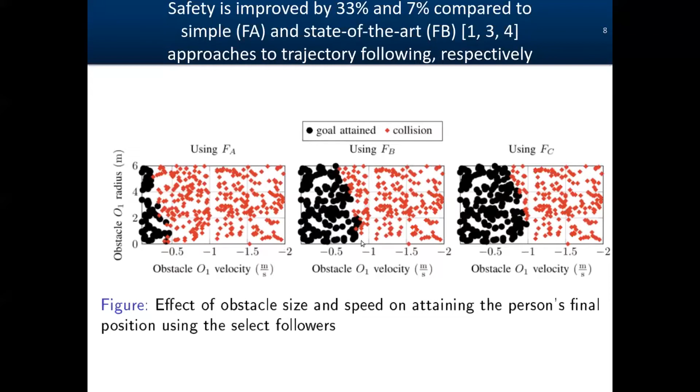Now, you can see that by using this approach, we're improving safety dramatically using the control signals in the cost functional, and we're doing that by improving tracking error and orientation error. And finally, it also improves performance, which is the time to the person. So this is a person following algorithm.

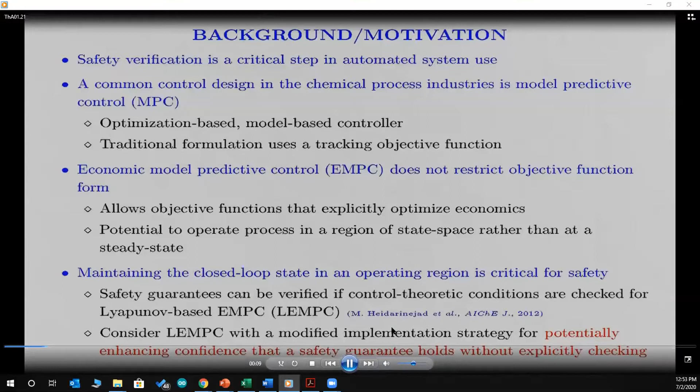Hello, my name is Charlotte. I'm a graduate student. This paper is titled Enhancing Practical Tractability of Lyapunov-Based Economic Model Predictive Control by Helen Durand and Dominic Messina at Wayne State University. The premise of this work is that the ability to verify that an automated system will operate a process safely is critical for the application of control to that process.

A common control design used in the chemical process industries, where safety is of paramount importance, is Model Predictive Control, or MPC, which is an optimization-based control law with constraints including a process model. The objective function of the controller's optimization problem has traditionally been formulated to track a steady state, but a more general formulation of MPC, meaning one that uses a general objective function and is therefore known as Economic Model Predictive Control, or EMPC, because that objective function can explicitly represent process economics, may not track a steady state.

Instead, it might operate a process within a region of state space. Then, safety is considered to mean that the state is maintained in that region of state space. An example of an EMPC formulation with constraints that allow this safety concept to be guaranteed under certain control theoretic conditions is Lyapunov-based EMPC, or LEMPC.

This work explores the concept that perhaps verifying that certain theoretical conditions required for safety under this controller could be made easier, in the sense that an end user might expect the conditions required for safety to be more likely to be met for given parameter values used in the control law without explicitly checking, but using a modified implementation strategy.

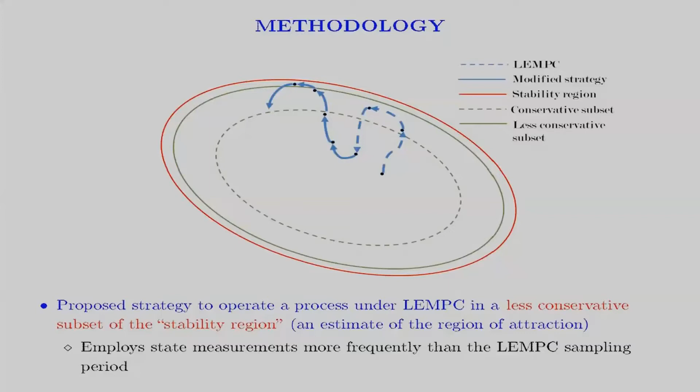In this implementation strategy, state measurement use in assessing and reacting to safety considerations is decoupled from the sampling frequency of the LEMPC. State measurements are assumed to be available much more frequently than the frequency with which the LEMPC uses them, and are used to check throughout the LEMPC sampling period whether the closed-loop state has left a subset of a set referred to as the stability region, which is an estimate of the region of attraction. When the closed-loop state at any of the times that the measurement is taken is outside of the subset of the stability region, a backup controller begins to be used instead of the LEMPC for the remainder of the LEMPC sampling period.

The result of this is that it allows less restrictive conditions to hold on the size of the subset of the stability region than if the LEMPC sampling period was used to design the subset of the stability region.

This may increase confidence that closed-loop stability or safety would be maintained under the controller even if the size of the subset of the stability region was not rigorously set using control theory, by effectively making a larger number of sets have the ability to guarantee closed-loop stability such that even potentially ad hoc selection of a set may have a greater likelihood of maintaining the closed-loop state in the desired region.

It also opens up the possibility of potentially tuning the size of the subset of the stability region online by modifying it to be smaller whenever the backup controller is implemented in the sampling period after a given size of the stability region subset is used.

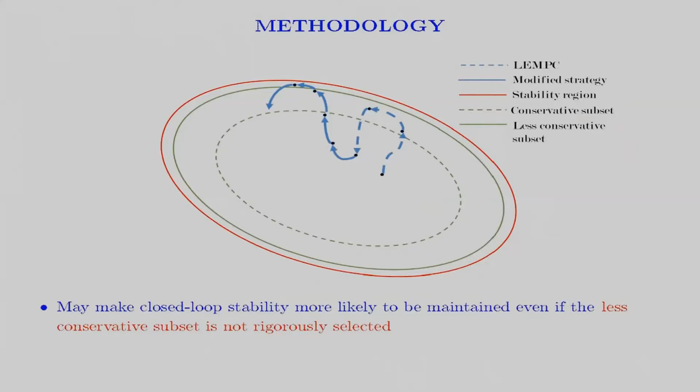I'm a graduate student in the MPC lab at UC Berkeley, and I'm going to be presenting task decomposition for iterative learning MPC. Recently, there's been a big push towards the topic of learning and control. My lab has approached this through Iterative Learning Control, or ILC, in which the controller uses collected data from previous task iterations in order to improve its closed-loop performance at the current iteration.

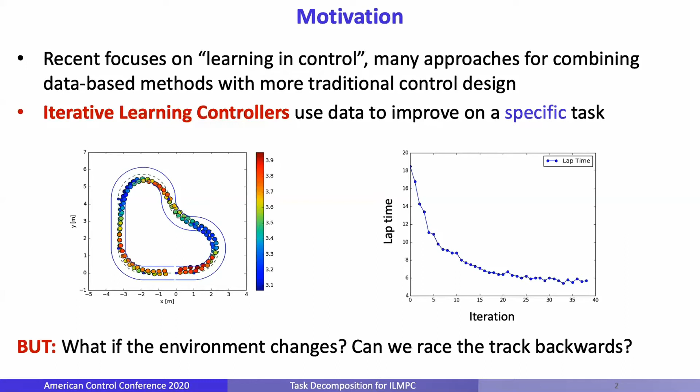For example, a car that is learning to race around a given track, improving its lap time at each iteration. However, ILCs learn a policy for a specific task environment, so if the environment changes, you have to design a new ILC. And ILCs need to be initialized with a feasible trajectory during the first iteration of a new task, and finding such an initial trajectory can be difficult for complex tasks.

Our goal is to use stored state and input trajectories, called executions, that solve n different tasks t and n different environments theta in order to find a feasible trajectory for a new task in a new environment, theta n+1. For example, can we find a feasible trajectory around a new racetrack using stored trajectories from previously raced tracks?

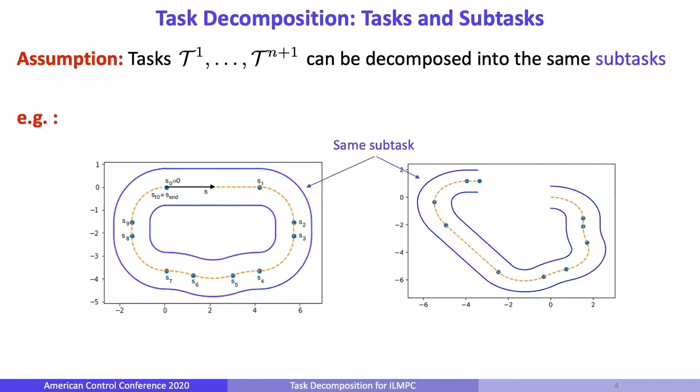We propose task decomposition, a simple but robust approach in which we assume that our control tasks can be decomposed into the same subtasks. Here, tasks are a concatenation of subtasks solved sequentially. For example, two racetracks may look different overall, but be composed of the same straightaways and curves, each representing a subtask. And if a new task is made up of subtasks that were solved previously, though perhaps in a different sequence, then we can piece together stored subtask trajectories in order to design a new task trajectory.

The first step is to break the new task into previously solved subtasks. Then we transfer the subtask trajectories to the new task, giving us information about how to solve individual components of the new task. Lastly, we'll try to piece the subtask executions together to form connected trajectories out of these segments. We use a data-driven reachability analysis.

First of all, notice that in the last subtask, all of the stored trajectories go to the end of the new task, thereby solving it. Next, we populate the previous subtask with the stored subtask trajectories. And then for each transfer trajectory, we determine if its last state can be controlled to the first state of a trajectory through the next subtask. If yes, then all points in that subtask trajectory are also controllable to the end of the new task. And if not, we remove the subtask trajectory from our task data bank.

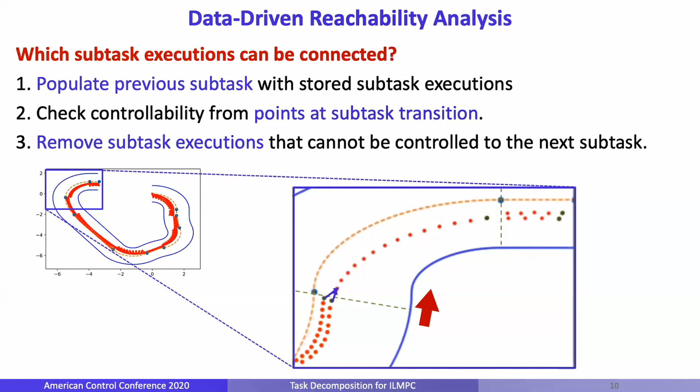We again populate the preceding subtask with stored trajectories and repeat the controllability analysis. As we move through the rest of the new subtask sequence, we form long trajectories out of trajectory segments, verifying controllability only at points of subtask transition.

The resulting trajectory is guaranteed to satisfy all state and input constraints in the new environment, incurs no higher closed-loop costs than a trajectory found using a simple initialization method, and can be used to directly solve the task, initialize an ILC, or for approximate dynamic programming. The proofs for these claims and results from autonomous racing and robotic pathfinding applications are found in the paper.